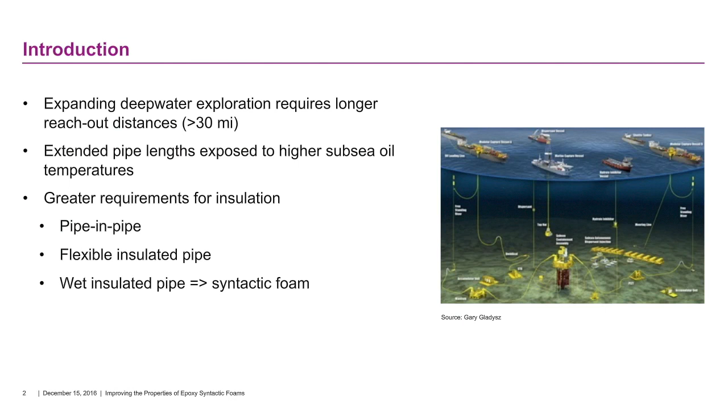Now that we've set the stage, I'd like to quickly review the research goals of our study. Part one is what we are presenting today, where we have started our investigation of how different monoanhydride and dianhydride blends can work effectively as thermal curatives for epoxy-based syntactic foams and improve the performance properties, specifically addressing some of the things we just covered.

Part two would go into greater depth, looking at modeling, where we would take the optimized blends and build models to predict in-service performance at different formulations and different depths, making the job of the formulator easier. Part three would be where we actually take some of these optimized formulations, fabricate parts, put them into service, and monitor them to confirm they're performing as predicted by the models.

So this is a longer term study, and part one is now coming together very nicely, and that's what we're very eager to share with you today.

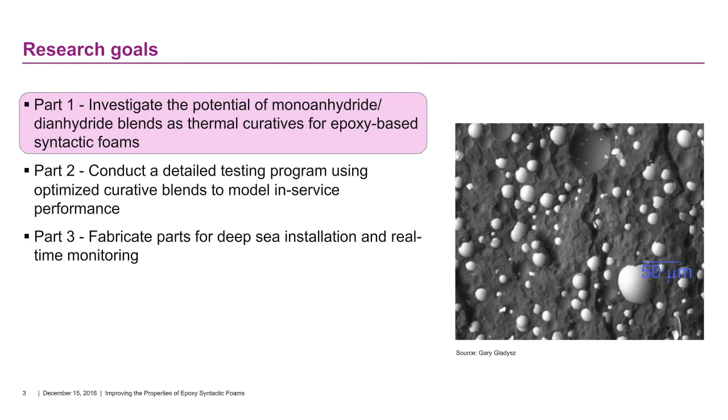We've spent a lot of time talking about syntactic foam, so let's take a moment to better define it. The term foam is a bit of a misnomer, but let me explain. What we're talking about is really a closed cell foam material, and the porosity is provided by hollow glass or ceramic microspheres in some type of binder, which can be organic or inorganic.

So this is a rigid foam material; if microspheres are used, it's a syntactic foam. It can also be blended with larger macrospheres to create what's called a composite syntactic foam. The term syntactic foam refers to bringing together different materials, think of syntax and how sentence elements are combined, this is the same kind of logic.

This type of formulation provides a number of different things. It's low in density, so it's lightweight and provides buoyancy. The round microsphere walls are very good with regards to compressive strength, so high hydrostatic pressures can be withstood. This insulating quality, due to low thermal conductivity, allows internal pipe temperatures to be maintained, giving reasonably good fluid flow and preventing things like paraffin formation.

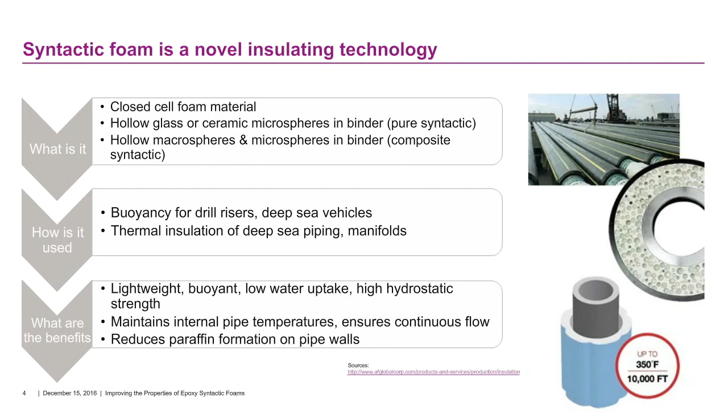It can be quite fragile at that interface, and the simple formulation has a lot to do with that, as you see here. So when we talk about weight and weight reduction, that means we have to look at density issues and buoyancy if that's required. It's a function of the sphere wall thickness and the loading level.

Loading level also comes into play regarding the ability of the foam to withstand hydrostatic pressure, basically the compressive strength of the foam. The round shape of the spheres obviously gives very good resistance to compressive forces, but the wall thickness is equally important.

Sphere wall thickness and loading level also come into play regarding insulation and the need to have the lowest possible thermal conductivity to truly insulate the pipe and its contents.

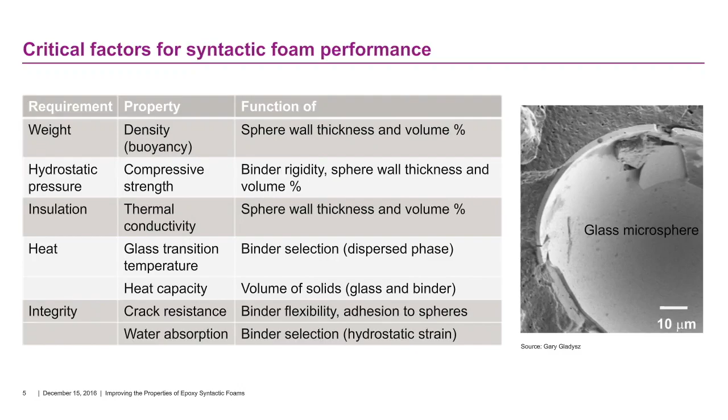Of the different syntactic foam formulations available today, the workhorse with a fairly long established track record has been those based on epoxy resin chemistry. A very standard DGEBA resin is utilized, and that type of resin can be cured under ambient or thermal curing conditions. Elevated temperature curing is really the way to go in order to drive the properties we've been mentioning.

The monoanhydrides listed here have been the traditional go-to curatives. The more flexible DDSA on the left and the more rigid MTHPA on the right are used in different combinations with this standard epoxy resin, and can produce very suitable epoxy syntactic foams that work well in service.

There are other types of polymer technologies coming on board now to fit into more niche applications, producing very intriguing properties, and those are listed here as well. But what we decided to focus on is how to improve that curative package.

We know that the inclusion of dianhydrides, known for good elevated temperature performance, if introduced here as well, you can put together some very interesting properties and make some very nice jumps in the things we were talking about before, in order to really drive performance. That's what we're going to show you next.

Anhydrides as a class of materials include both monoanhydrides and dianhydrides. The easiest distinction is that monoanhydrides are traditionally liquids. So right away that's interesting because they're easier to mix and easier to process in the syntactic foam formulation. One such example would be something like nadic methyl anhydride.

Solid dianhydrides, BTDA being a prime example, are really known for sustainable properties under higher temperature conditions, so they seem very well suited for this type of formulation. The hindrance is that these are solids, so now you're trying to disperse a powdered material into this mix, and you can understand some of the hindrances and aggravation involved in doing that.

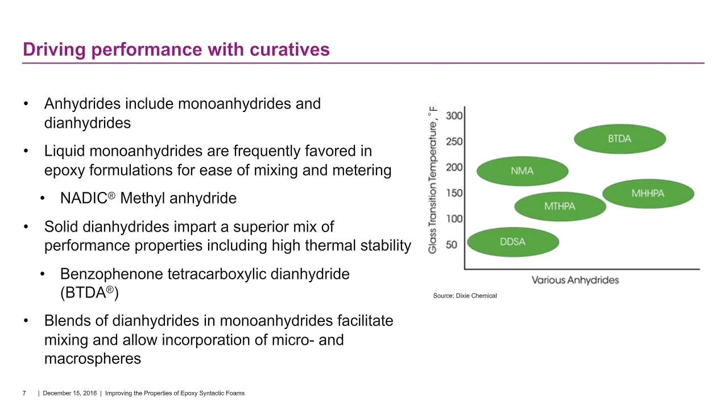So if you can put blends together, this is where we see a benefit. If you look at this quick graph showing different levels of glass transition performance, you see that when you start looking at liquids and maybe incorporating the dianhydride, you can really make a marked increase in Tg, and drive those things we've been speaking about: heat resistance and overall performance of the syntactic foam in service.

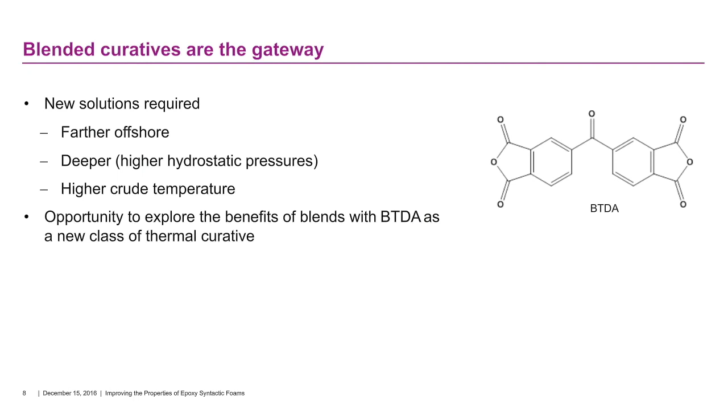It's our opinion that blended curatives with dianhydrides become the gateway to really addressing some of these formulation challenges that the market is now presenting. Rigs being placed farther offshore, deep water explorations requiring much longer lengths of pipe, higher hydrostatic pressures, higher crude oil temperatures. So there's an opportunity here, and this is why we want to explore the benefits of new types of blends to really serve as a better class of thermal curative.

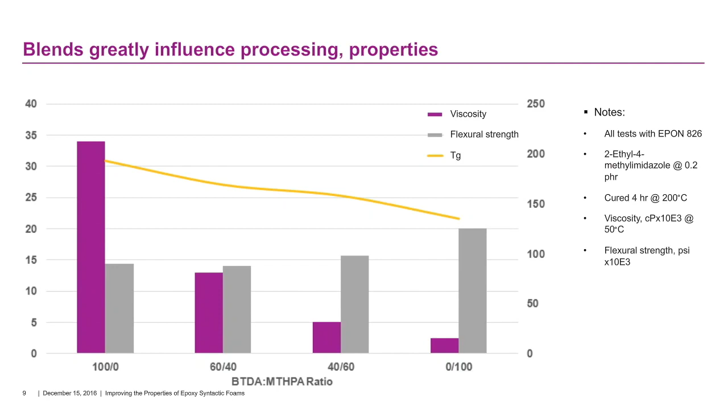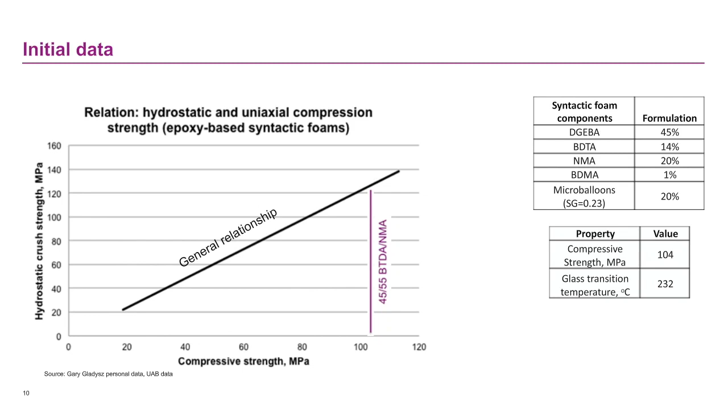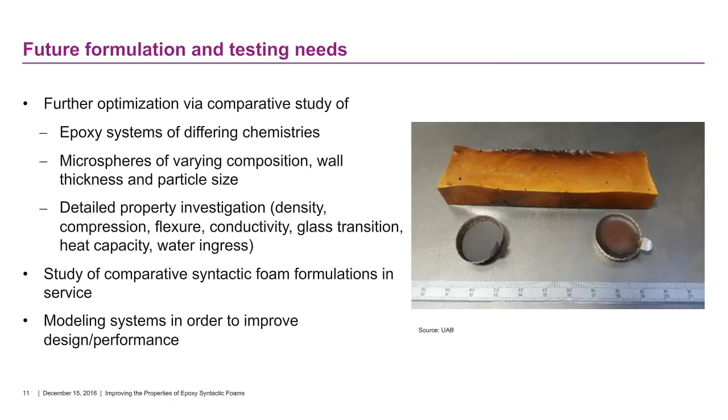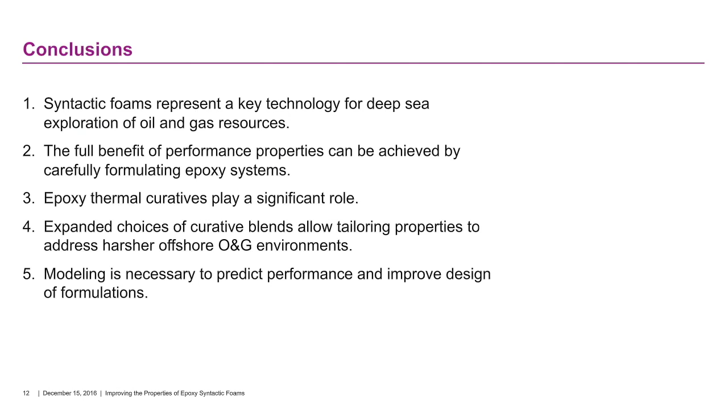The modeling step will come down the road, and that will be very critical to formulators to save them the time and trouble of their own trial and error experiments, and rather plug in and select for their given application what the optimal formulation would be. That's a direction that we clearly want to move in, and some first steps are being made in that direction.

It's my great pleasure to acknowledge and give special thanks to two contributors that have really helped us put this program together and produce these very interesting results which have intrigued all of us. Dr. Gary Gladysz, who is serving as a consultant, has played a vital role, as well as Dr. Brian Pillay and his staff at the University of Alabama, Birmingham, who has been very active in building and conducting the testing program on our behalf. Thank you, gentlemen.